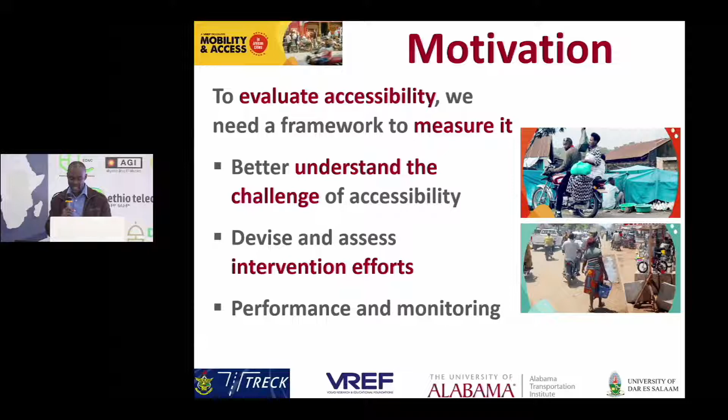So in what we refer to as informal urban communities, these are usually communities that have limited, for instance, land rights or limited social amenities, limited transport infrastructure. And in Sub-Saharan Africa, this constitutes about 72% of our urban landscape, and that is a huge part of most of our urban areas or cities in Sub-Saharan Africa.

And as we acknowledged earlier, they are limited. They also have limited facilities. Road construction may not be well maintained in those areas, or they may not have transport means. They might rely on non-motorized transport to be able to access some of these facilities as well. So they are limited in terms of addressing or mitigating some of these access issues.

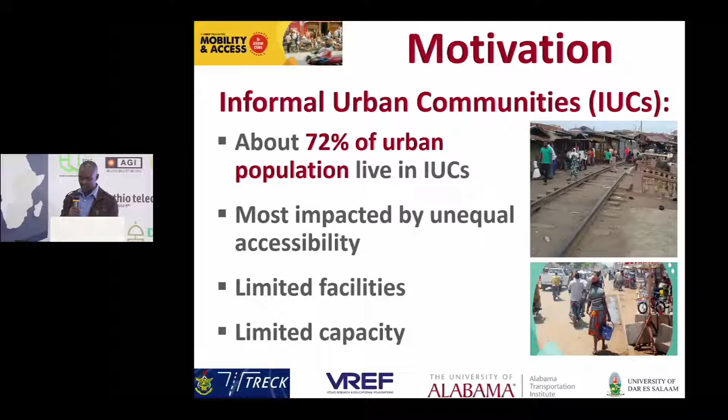So the challenge that we intend to address in this project was, how do informal urban communities perceive, experience, and use transport in their daily activities? And by this, we are not only looking at how we have provided road facilities and transport facilities, but we also want to know how users perceive and undertake those daily activities as well.

And we restate this, or reframe the research question, in terms of the extent to which that potential is achieved as an indicator of the performance of the transport system.

So to be able to do this measurement, we looked at two key measures. One is what we refer to as objective accessibility, and by this we mean once we are able to provide transport infrastructure and vehicles, either motorized or non-motorized, how does this facilitate people in reaching, for instance, a workplace, a healthcare place, school, or market? So that will be the objective accessibility, and this will be defined by the quality of the road network and the mode of transport used.

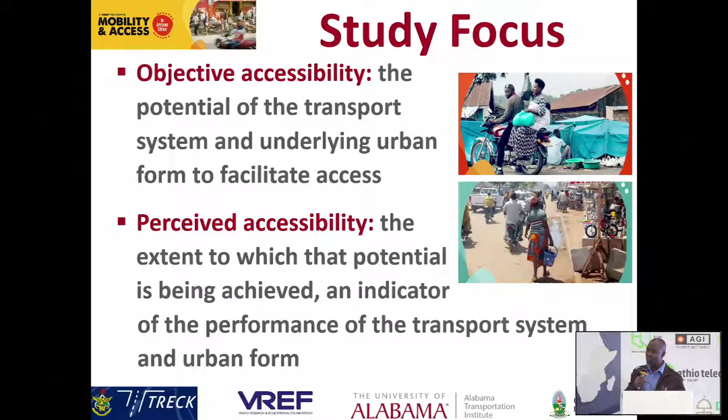But then we also look at the perceived accessibility, which is how users actually experience it. This is a way of assessing how our transport facility or infrastructure is performing, how it's helping people access a workplace, healthcare, a marketplace, a school, and all of those areas. So these are the two major aspects of accessibility we looked at, so that we can use it to assess transport infrastructure in general.

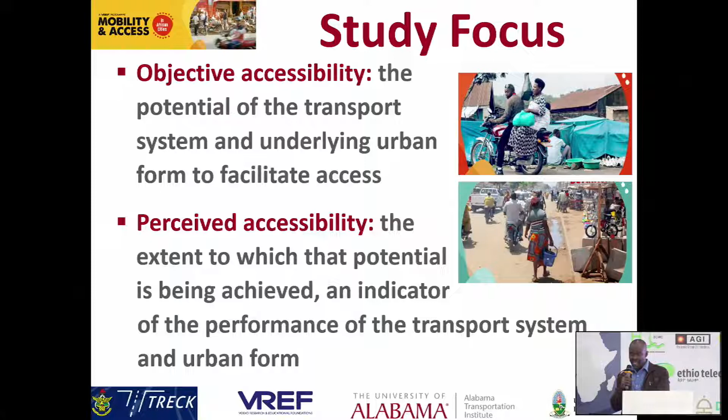To do this, we've looked at a number of socioeconomic and cultural opportunities, in terms of workplace, healthcare, shopping or markets, and the extent to which people can also access a school, place of worship, and family and friends.

The reason why we segregated quite a number of these basic needs is that sometimes people may participate in only one or two of them. For instance, if you are unemployed, you may not be able to travel to work. Or if you are not going to school, or you've finished school, you may not be able to answer that part of the question. So we've got a range of accessibility areas, so we can get a broad picture of how people actually experience accessing these opportunities.

So to do this, these are some of the study communities shown in this map. Here we are simply showing the map of Ghana, and Kumasi is around the middle of the country. Within Kumasi, we've selected a number of communities which we consider informal urban communities within the city. Kumasi is the second largest city in Ghana, a very sprawling city with a very high population density, and there are quite a number of informal communities with high density of buildings that impact how people access different opportunities.

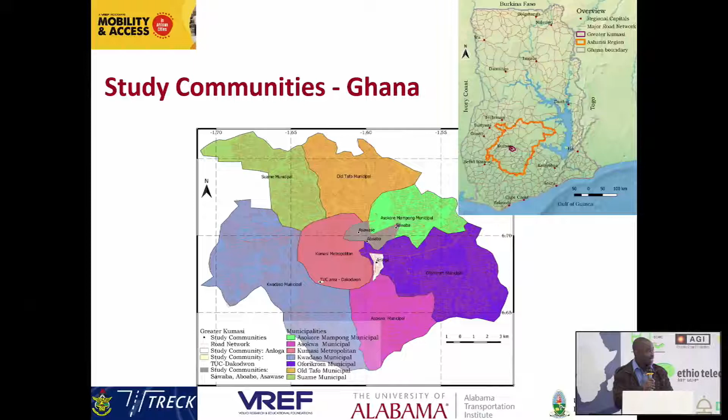The second city is Dar es Salaam in Tanzania, where we've also selected a number of communities. Dar es Salaam is a much bigger city compared to Kumasi, and has a higher population density, but there are similar transport modes in terms of paratransits, motorbike taxis, and tricycles used in both cities. So that is also a basis for comparing these two cities.

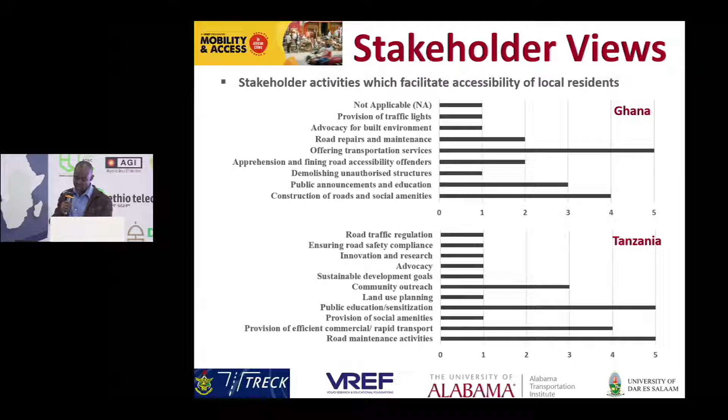Some of the things listed include offering transport services, construction of roads and social amenities, land use planning, settlement planning, and road maintenance activities. These are some of the leading stakeholder activities common to both cities.

There's also a question about what the stakeholders consider to be the causes of access problems, including lack of accessibility planning, traffic jams, traditional rulers or council collaborate poorly, lack of maintenance culture, poor implementation of policies, lack of logistics, poor transport coordination, and informal settlements as one of the common themes.

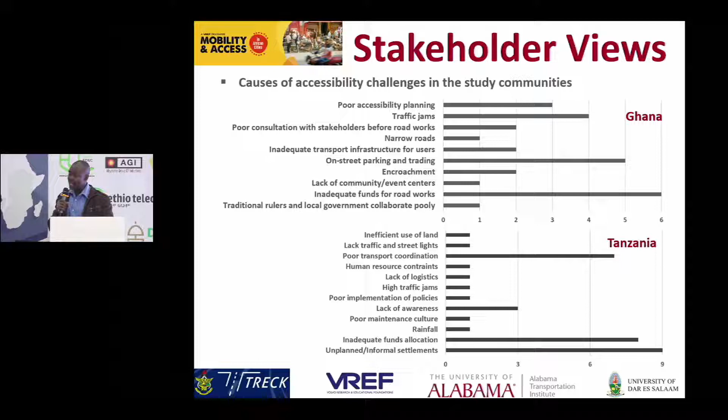We also looked at the solutions they recommended to mitigate accessibility issues in the community. These include public education or sensitization in both cities, BRT and bus stops, addressing illegal street parking, adequate provision for walkways and road signs, effective community planning, and proper periodic maintenance as a common solution between the two cities.

So the key takeaway from our stakeholder engagement for these two cities is, first, that most of the stakeholders are very knowledgeable about accessibility issues, which is very encouraging for coordinating activities between various stakeholders. This is common for both Tanzania and Ghana in our stakeholder consultation.

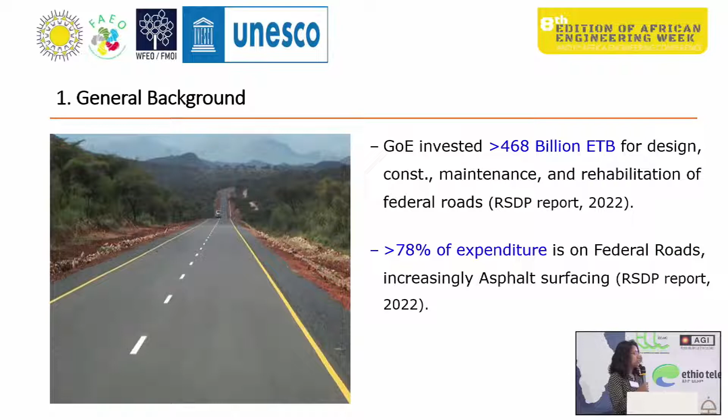As general background, we know that roads are very crucial for the economic development of any country. In this country, our government has been spending billions of dollars, especially for the last 24 years, towards the road sector. Most of this investment is allocated to federal roads. But the problem is that some of this investment, or part of it, is being threatened by premature failure of the roads.

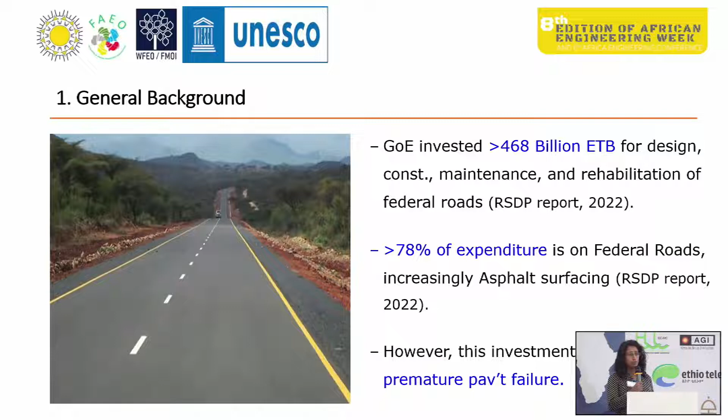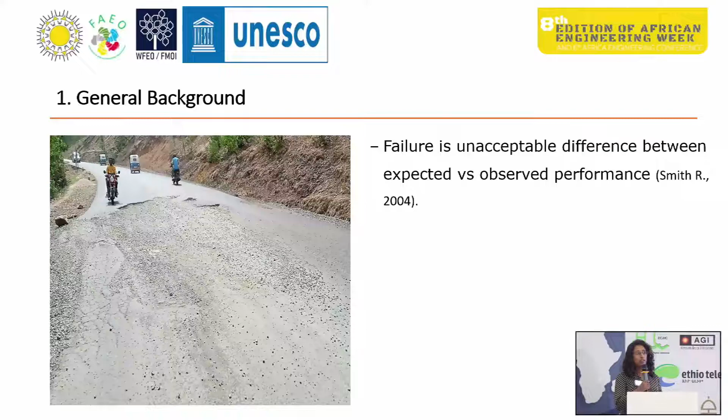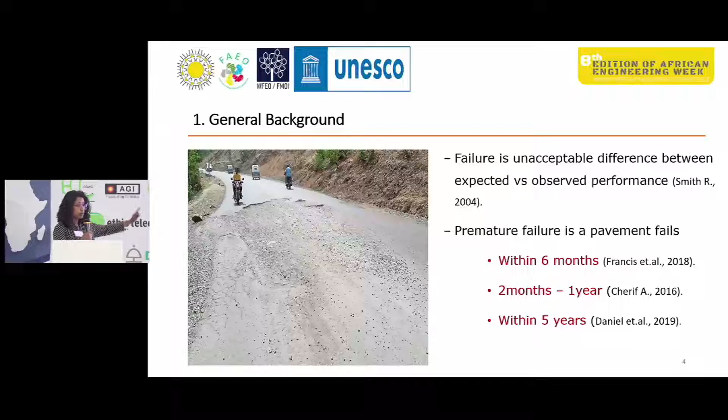So how do we define failure? There are various definitions, but one is that failure is an unacceptable difference between what is expected and what is actually realized. So how do we define a premature failure? According to different authors, it's a failure of a pavement way earlier than its design life. For example, if it fails within 6 months, according to Francis, it's said to be prematurely failed, or within 2 months to a year according to Cherif, or within 5 years after being opened to traffic. For our case, we considered a road that fails before serving a quarter of its design life as prematurely failed.

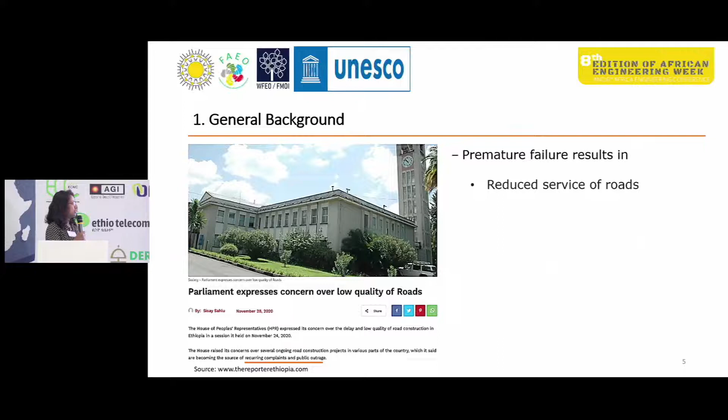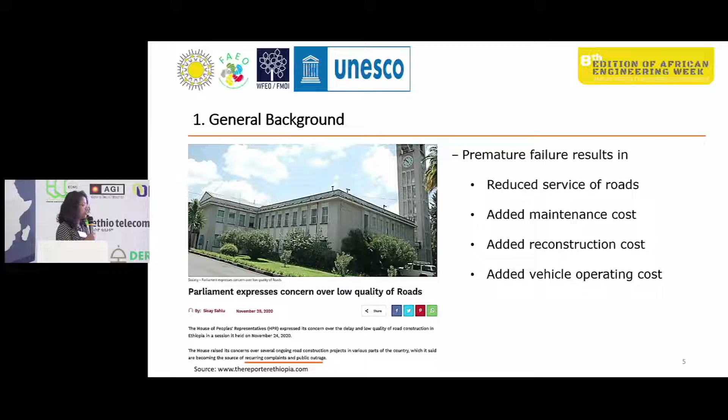So is this really a problem? And if it is, what is the extent of the problem? The problem with premature failure is that it reduces the service life of roads, adds to maintenance costs, causes added reconstruction, increases vehicle operating cost, and causes safety and comfort issues. As you can see here, this is an issue in some parts of the country.

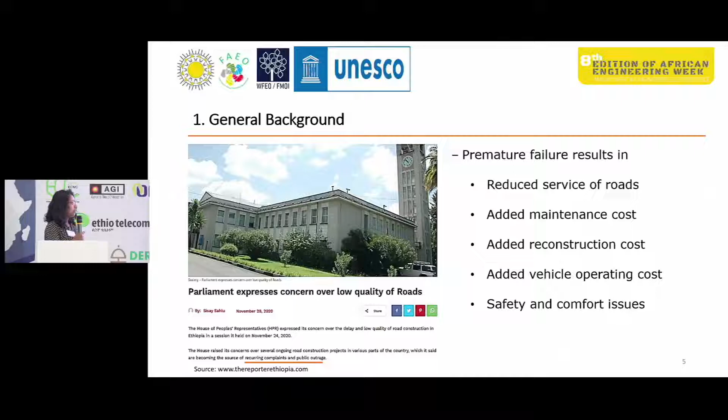There have been a number of case studies done to address this problem. The literature gap we identified is that, except for one paper, all of these studies didn't focus on premature failure specifically, but on failure in general. We would like to fill this gap with our study. The next gap we want to fill is that most of these studies are usually case studies based on laboratory study. What we'd like to do is also conduct field studies, investigate the asphalt characteristics as well, and try to make a generic conclusion about the trends of premature failure in this country.

So what is the objective of the study? In general, to identify the causes of premature asphalt concrete pavement failure and propose remedial measures so that similar problems will not occur in the future. The specific objectives include assessing the modes of failure on the roads, identifying the causes for those failures, and proposing remedial solutions for the identified problems.

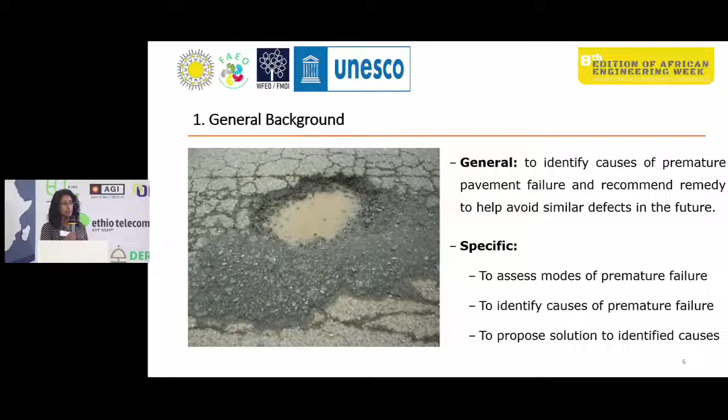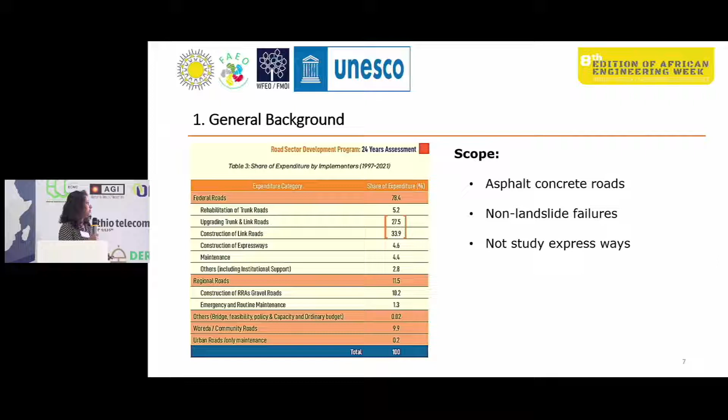So now let's see the methodology. Just like any research, we prepared the proposal, did the literature review, designed our research, and did preliminary assessment on selected potential sample roads.

Once we were convinced that a given road had failed prematurely based on our site assessment, we did a detailed investigation, starting from a desk study, meaning collecting previous design documents, reports, condition surveys, and so on about the road. Then we supported that with a field study and a laboratory study, analyzed the results, and produced a report as well as a draft journal article.

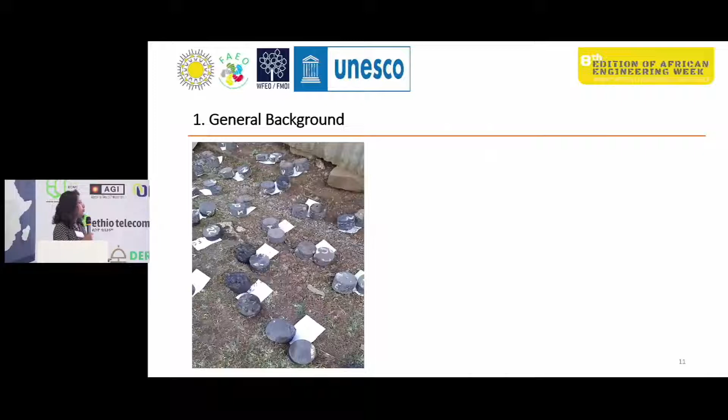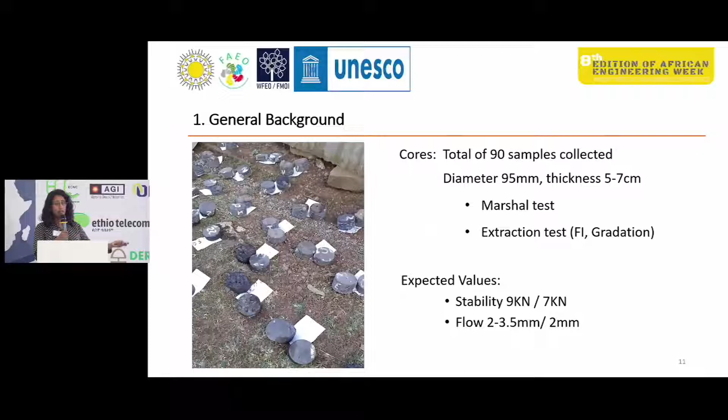This is the way we went about it, showing some of the laboratory tests we did. We contrasted our findings with the stipulations of the specification, the ERA manual specification. Also for the asphalt layer, we did a Marshall test and extraction test, and contrasted it with provisions of the specification as well as the assumptions of the design.

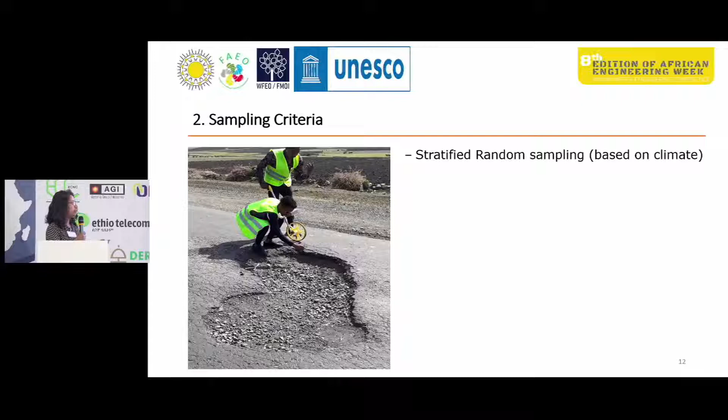Now let's see the sampling criteria. These are our researchers, Leknau and Tashome, as you will see in the abstract. Initially, we were preparing to do our sampling based on stratified random sampling, based on climate, and we were preparing to estimate the population size or sample size like this.

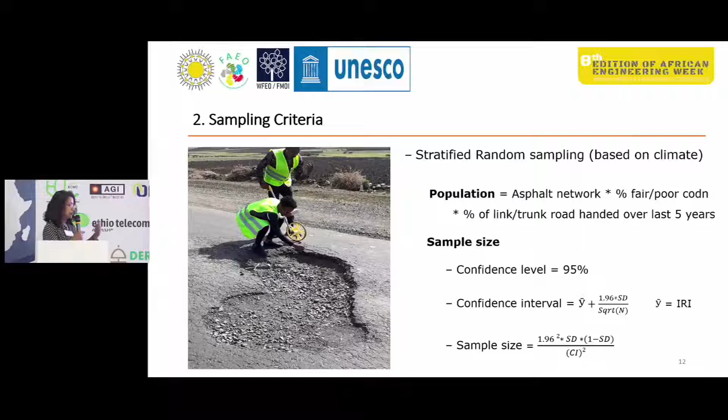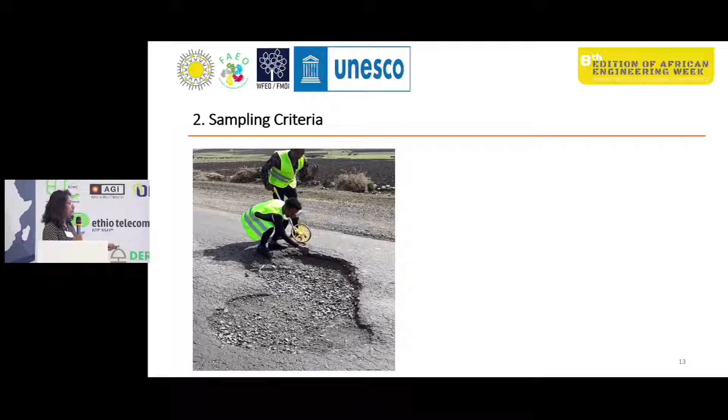However, we found that it just didn't work. We had to make specific judgment about the road, first visually, to determine if it should be sampled. For that reason, we changed our sampling strategy to purposive sampling, or non-probabilistic sampling. In that, we considered structural deformation or rutting. We selected tangent sections of the road for sampling, studied both the good and the defective sections, and considered a 300-meter stretch of the road as per our research procedures manual.

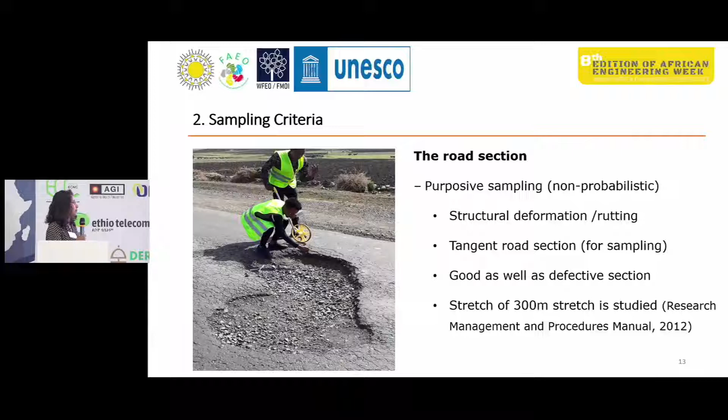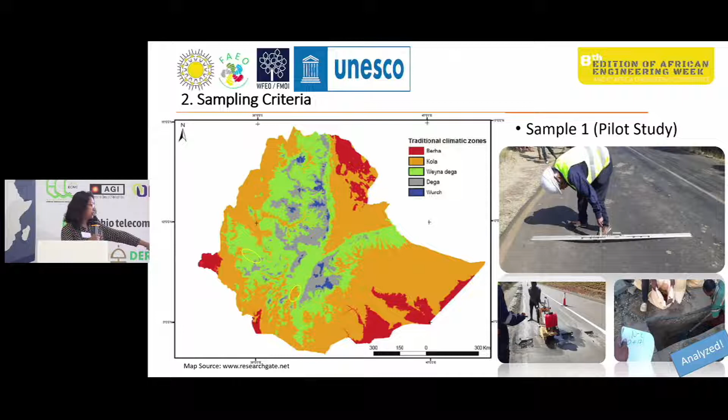This is the first pilot study we did, in the western part of our country. As you can see, we did visual assessment and analyzed everything. This is the second sample, taken in the southern part of our country. Here too, beyond visual assessment, as you can see, it has deteriorated very badly. We analyzed this in detail, and I will present a very brief overview of the findings for these roads.

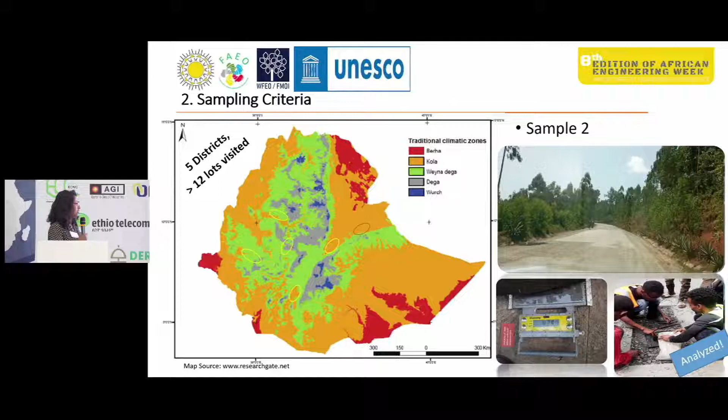For your information, we are also currently trying to assess our third road, in the eastern part of the country. To date, we have also assessed a number of lots in 5 districts, and more than 12 lots have been visited, but only 3 of those have met our premature failure criteria.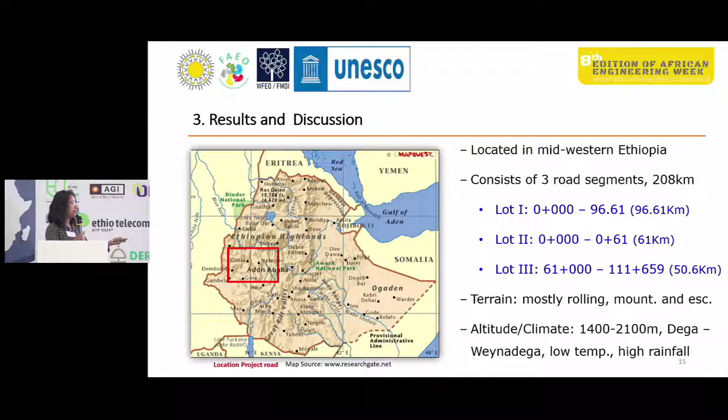This is a basic description of our first sample. It is located in Midwestern Ethiopia and consists of 3 road segments, meaning it was constructed by 3 contractors. The terrain is mostly rolling, though sometimes mountainous and escarpment sections are also observed. The area is a bit cold, with low temperature and high rainfall, sometimes with problematic soil underneath.

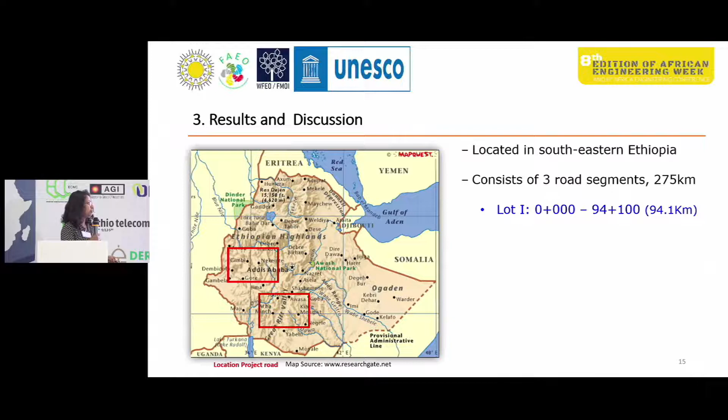For our second sample, located in the southeastern part of the country, it contains 3 road segments, but for our case we only selected one of them. The terrain is mostly rolling, sometimes flat to escarpment. The altitude ranges from 1,600 to 2,800 meters, and depending on the season, it can be very hot or very rainy.

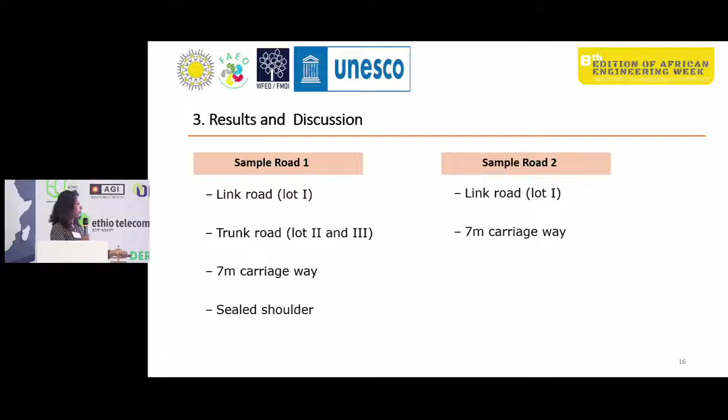As further description of the samples, functionally we have 1 link road and 2 trunk roads here, and 1 link road here. Both have a 7-meter carriageway. This one has a sealed shoulder, and this one has an unsealed shoulder.

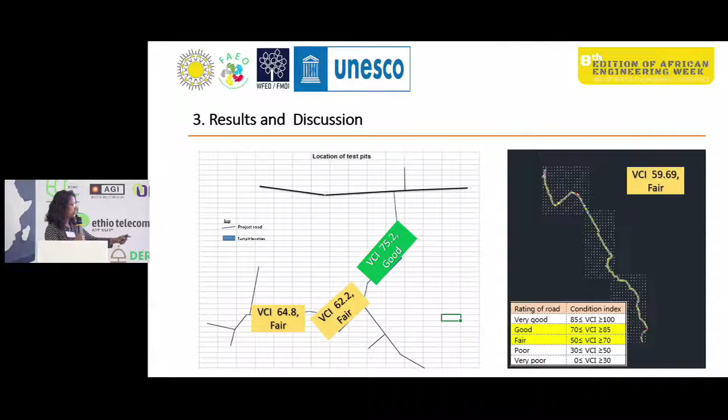Now, when we first did our condition survey, this is what we found. The first lot is in good condition, but that doesn't mean it doesn't have some extreme rutting. This one was in fair condition, this one was in fair condition, and this one was in fair condition. Fair is next to poor, so it's not the highest quality.

Traffic is one of the primary causes for pavement deterioration and pavement failure. The design traffic was DS4, and for the first sample it was designed for T6. But in actual fact, it was carrying a traffic load of T8 and T7, which means it was carrying double or triple of the design assumption.

For the second road, it was designed for T5, but however it was carrying a traffic load of T9. This also means the axle load has increased 5 times. The actual axle load is 5 times compared to the design assumption.

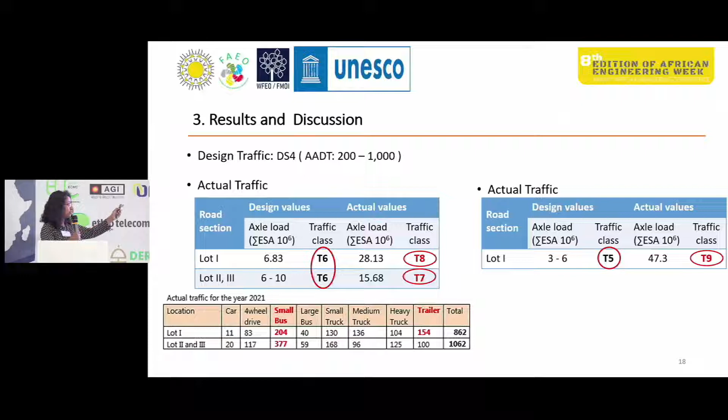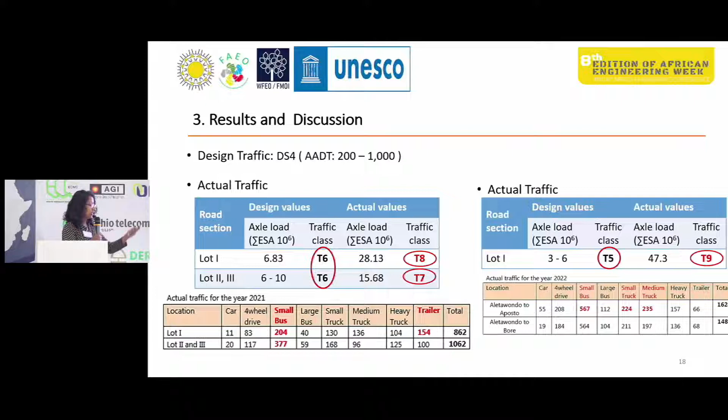When we try to see in depth what has changed with the traffic data, this is what we found. For the first sample, the number of small buses has significantly increased, and the trailers have also substantially increased, but the volume of traffic was reasonably forecasted - it's just the traffic load. But for this one, the volume of traffic exceeds the design assumption, and the axle load has also incredibly exceeded the design assumption.

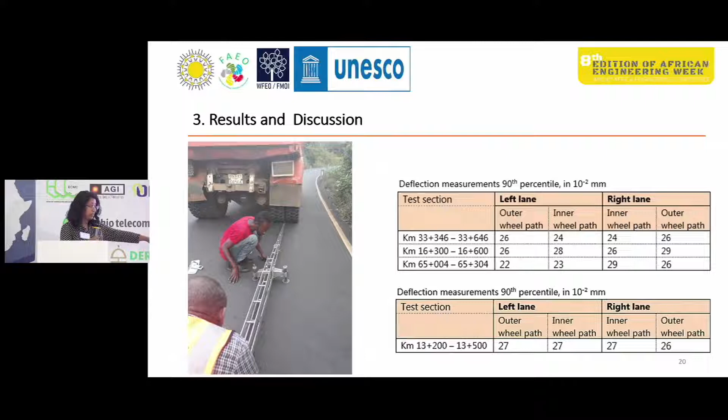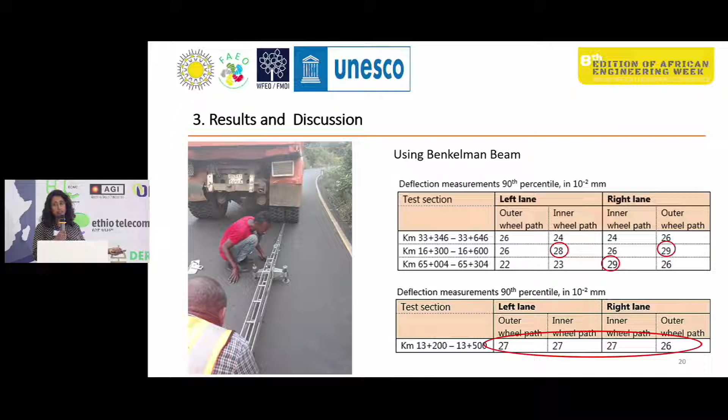For the second sample, there is extreme rutting in the inner wheel path, which is an indication of a structural problem. These are the values that we found for deflection. We used a Benkelman beam for lack of a better instrument. There is no restriction on the severity of deflection according to the ERA manual, but according to the Tanzania manual, this is not a severe deflection.

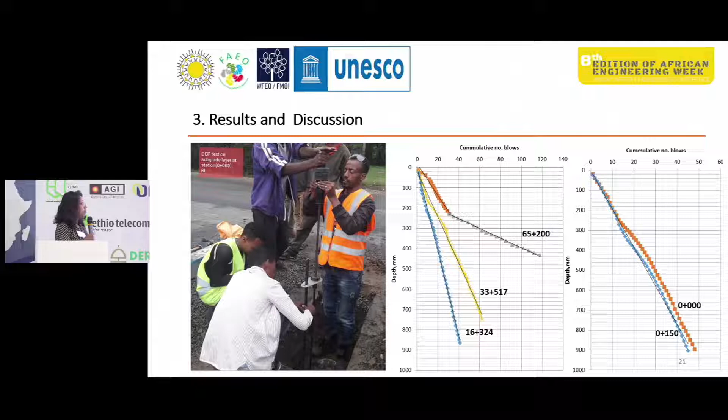This is also our DCP measurement on site, which is consistent with our CBR findings. We also tried to measure the thickness of the road compared to the designed assumption - this is the designed thickness. For the first sample, we found that all of the layers have the required thickness, except for the sub-base of the first lot and the asphalt road of the second lot.

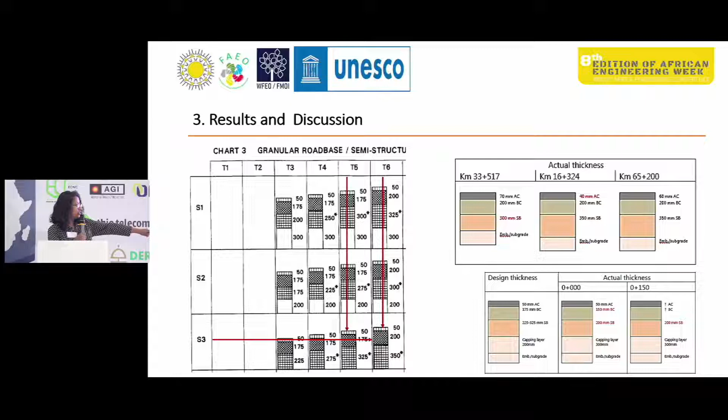This is the design thickness for the second sample. As you can see here, it has significant problems with thickness for both the base course and the sub-base. Now let's see the laboratory results and discussion.

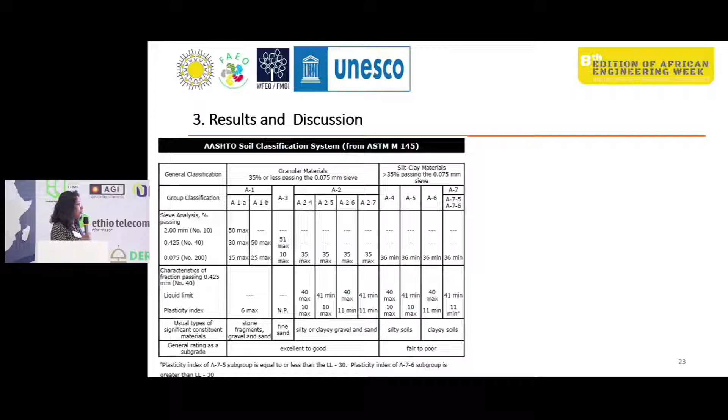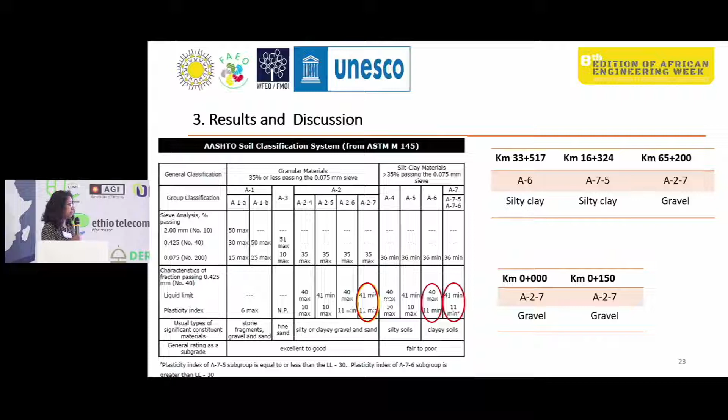For the second sample, the material was good subgrade material - actually it was a capping layer. So this is just an overview of the results. The red indicates the field criteria.

In the interest of time, we summarized the whole thing like this. For the first lot, which is a link road, the defect we found was for the sub-base: poor quality material, poor compaction and thickness issue. For the base course there is a gradation problem and compaction problem.

For the second lot, except for the compaction of the sub-base, we found a material quality problem and compaction problem throughout the layers. For the third lot, there is a compaction problem for the sub-base, and for the base course there is a poor quality material and poor compaction problem.

For the second sample, the subgrade material is good, it is a capping material, but the quality of material, the compaction and the thickness were problems for both the sub-base and the base course.

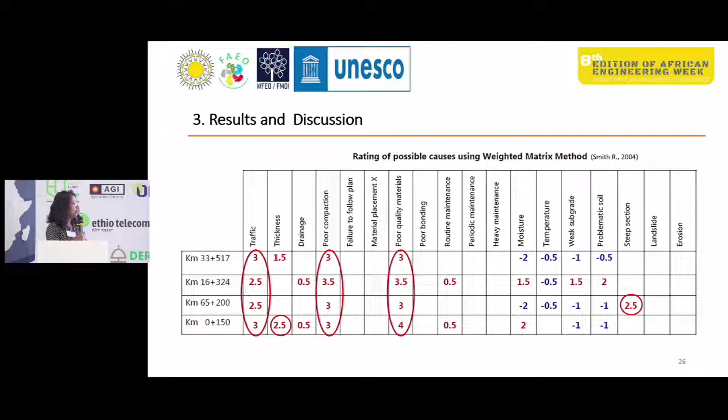This is next to my last slide, so we tried to quantify and prioritize the most probable cause of failure, and we find that poor quality material is the most probable cause of failure for the roads, and poor compaction is also a problem. We also identified increase in traffic load as a primary problem for the failure of the roads, and for some sections, terrain and improper thickness of the pavement have also contributed.

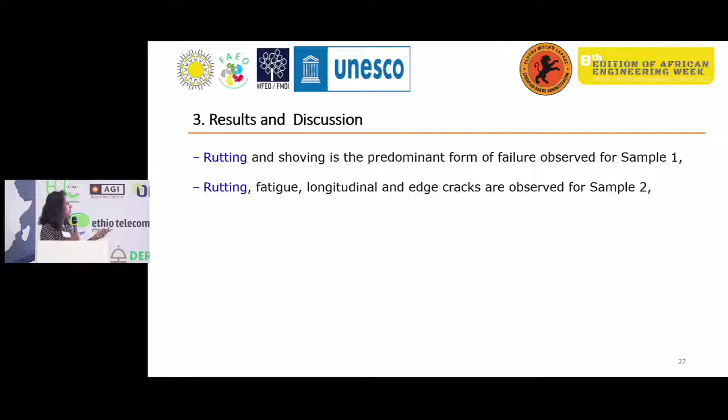As to the mode of failure, we find rutting and shoving as the predominant form of failure for sample 1, and rutting, fatigue, longitudinal and edge cracks were considered for sample 2. We have already discussed this one.

Our recommendation is that we should use good quality materials for our road construction. We should have strict supervision on site and quality assurance on site, and we should ensure that our site laboratories are reliable, and there needs to be proper compaction of layers.

According to South Africa's most established researcher, Philip Paige-Green, compaction is one of the least costly, cheapest ways to increase the quality of our roads. So we need to work on compaction. We also need to consider the percentage of heavy vehicle projection in our traffic forecast, and routine maintenance and axle load control should be given paramount attention.

These are the people we would like to thank for the success of this project: all the regional management directors, road asset personnel and the respective districts, and the organizers of this workshop. Thank you very much.

When she was talking about road quality, I was just wondering about the Trans-African route that stretches all the way from Cairo down to Cape Town. I had the pleasure of hosting the event where former President Uhuru Kenyatta and my Prime Minister Dr. Abiy launched part of that road, stretching from Moyale all the way to Hawassa. And between Hawassa and Ziway, how many kilometers would it be, Engineer Jonas? About 50 kilometers remaining to finish connecting Addis to Hawassa, to the port city of Mojo, then Hawassa, then Ziway, then all the way to Moyale, crossing through Kenya and down to the last station.

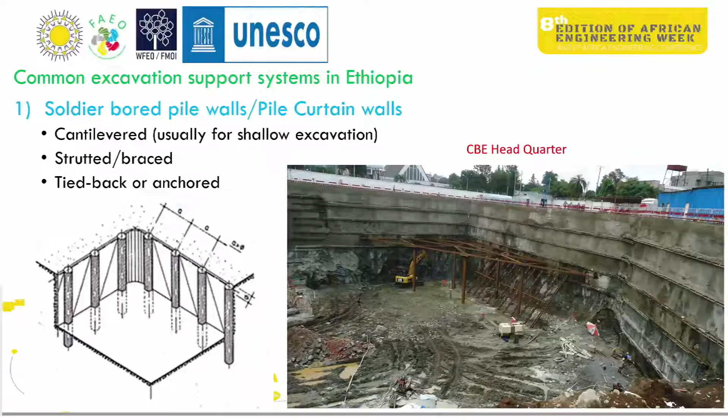In some parts I will touch on the practice done in the Omo River, but generally I will concentrate on the 4 basic practices done in Addis. The first and most common excavation support system in Addis Ababa is soldier bored pile walls. This kind of wall has been practiced for more than 10 years in Addis Ababa. We encounter more than 100 projects every year here, especially - the bottom right picture depicts the one used in the headquarters of the Commercial Bank of Ethiopia.

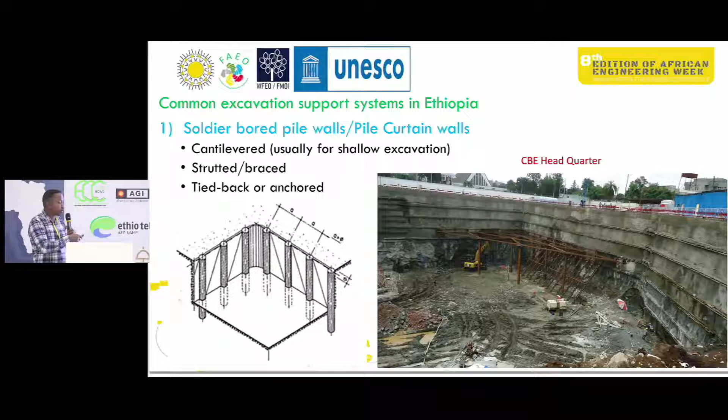It may be constructed using different combinations, but the most practiced ones are three: the cantilevered, the braced, and the tie-backed anchor ones. Basically, for shallow excavations we use the cantilevered type wall, but the rest are practiced when the depth of excavation increases and other circumstances occur. Especially the tie-backed or anchored type - it is somewhat time consuming and needs a lot of activities, so we usually use it for deep excavation of more than 8 or 9 meters.

The next common aspect of excavation support systems in Addis is the secant pile wall system.

In my experience, we have encountered this kind of construction twice. One is the Ethiopian Red Cross Society headquarter building, located near the Commercial Bank of Ethiopia, which is under construction - you can see it at the right bottom corner. In the middle is a shallow depth excavation done using a similar technique, including a corner brace, constructed for the Omo River bridge. These are schematic pictures to show that.

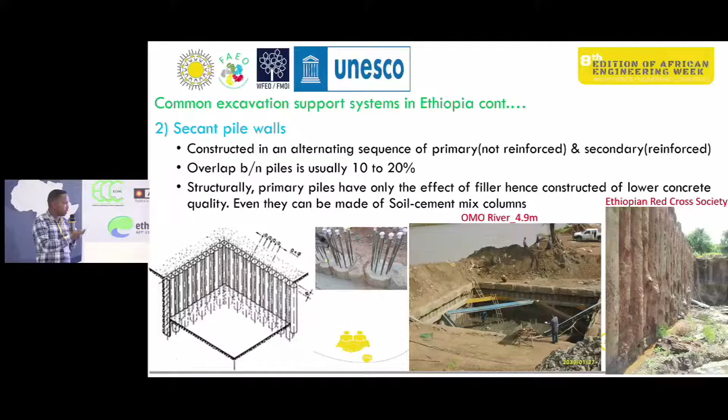Basically I like this type of construction because it's cost effective, but it's not as commonly used as the previous one. They can even be made from cement and soil mix columns, but the most common approach in our country is using primary and secondary piles, both concrete, but one reinforced and the other not reinforced.

The third common type - I don't know if you'll be familiar with this one - I always wonder whether this is permitted to be constructed in the city, but we encounter it a lot. I've encountered this kind of construction 7 times. You can see it at the right bottom corner. It's similar to the first type of construction, but to reduce the cost of reinforcement, they replace the reinforcement with treated woods, which are also used for shallow excavations.

Usually the piles range up to 9 meters, so the excavation is limited within 6 meters. This type of construction is common, and you will also encounter its failures. The one you see on the right is constructed, but it has also failed. It has no analysis or design concept - it's simply based on tradition.

The fourth common type - this one, I think, is patented. The owner of this construction company claims that he has patented it. It's based purely on labor. As you can see, it's done by manually digging cantilever pile walls and replacing them with concrete, done in stages.

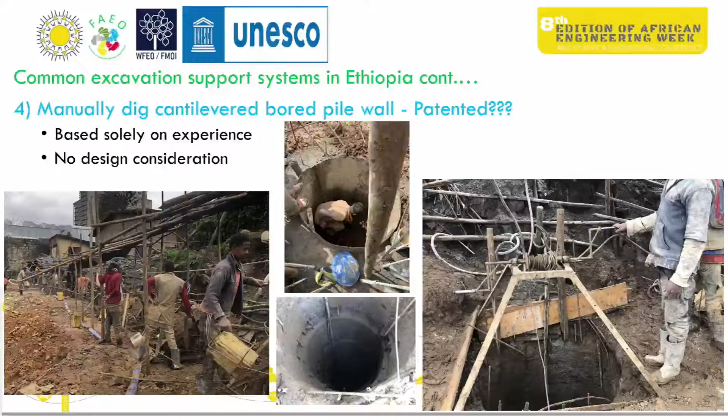It's very costly and very wide, but even in the downtown we encounter such projects. Even at the back side of this, there is a construction being undertaken using this method. This is a picture taken from that site.

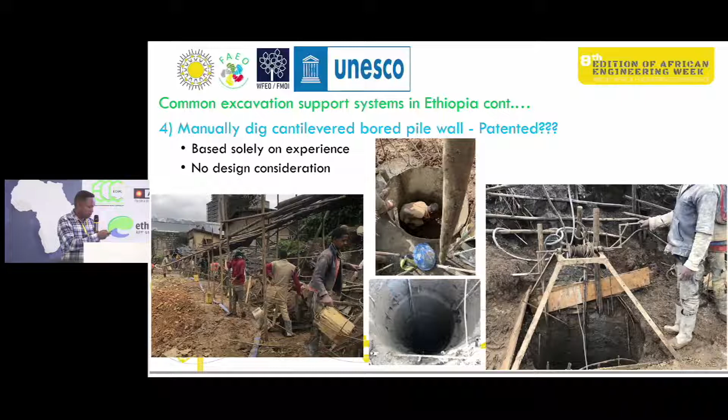So these four types of deep excavation support systems are the most common in Addis: the manually dug type, the one that replaces reinforcement with treated wood, the secant pile type, and the soldier pile and bored pile types.

Most of the time we encounter failures here and there, especially related to these deep excavations, particularly near existing structures. They commonly suffer from such problems.

So what are the common causes of such failures? We have tried to categorize them into 3 parts. The first common category we encountered is design-related issues. Under this there are many issues: poor geotechnical investigation reports, lack of expertise, the academic learning process also has its role, the manner in which professionals are accredited, and the lack of esteem for the profession, as evidenced by the salaries for these types of projects. The basic one we got from these categories is GIGO - garbage in, garbage out.

Most of the time, those involved in such design and analysis try to use either limit equilibrium, finite element, finite difference, or P-Y curve analysis. They simply feed the software whatever it asks without knowing, or with minimal background knowledge. Then it gives them an analysis output, which they use for construction, and then there is failure.

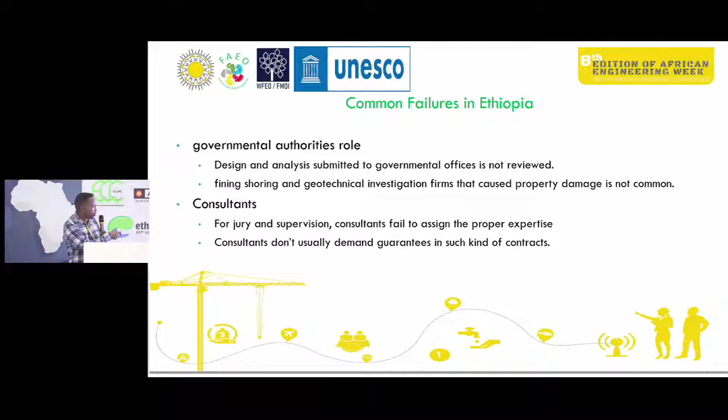The other issue is related to consultants. Most of the time, thinking it's a specialty, they don't treat it properly in terms of contract administration, assigning the right supervision, assigning jury, or even asking for guarantees. So if something fails, since the client has no guarantee for such construction, it becomes the client's burden, not the contractor's. Most of the time, consultants and such companies are weak in terms of this contractual aspect, especially for deep excavation support systems.

The other issue is poor construction, aside from design and analysis. During construction, this has a big role, especially the casing type, which most of the time isn't given enough concern. Most excavations or pile drilling can go to 20 meters deep. In the middle of that process, a lot of soil may collapse, and without using casings, many shorings have failed. I will show you a picture later.

The other issue is client interference. Clients have their own interests, especially after construction is completed—they need to extend the depth of excavation. They'll ask, what will happen if we go one more meter? They say, I will take the risk, please, I will take responsibility later. Then the whole area ends up in a crisis.

Next is the construction sequence. Clients usually want a whole meter of excavation completed within 1 to 3 days. They don't want to maintain the proper construction sequence. So clients specifically are involved in causing this kind of fault.

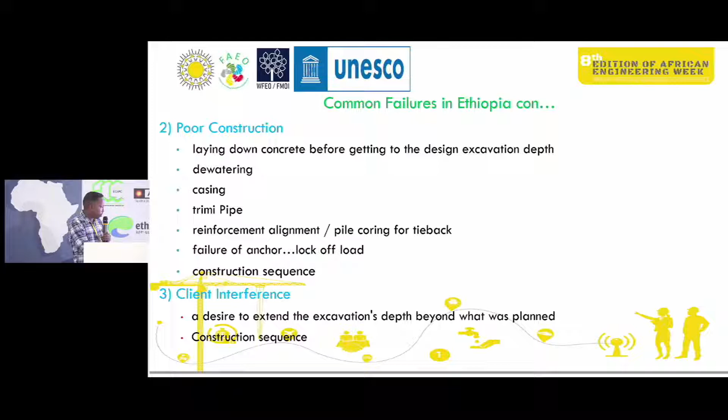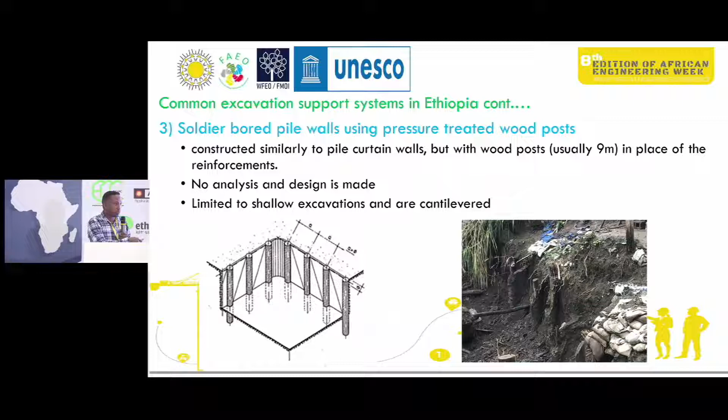The problem with this one was that they were advised to use proper construction, but the clients preferred to save $1 million, so they went with a type of construction that replaced reinforcement with treated wood. There was a lot of dialogue, but the clients preferred this option because it was $1 million cheaper. What happened was this catastrophic failure on the right side—a total of 4.5 million was lost. In order to save 1 million, the client lost more than 4.5 million.

For this project, my colleague Dr. Engineer Henok and I were involved in the mitigation action. What surprised me about this project was that the client was not happy with the local contractors or even practicing engineers. During the discussion, while we were presenting the remedial action to him, he was trying to negotiate with the neighboring people in order to own their land.

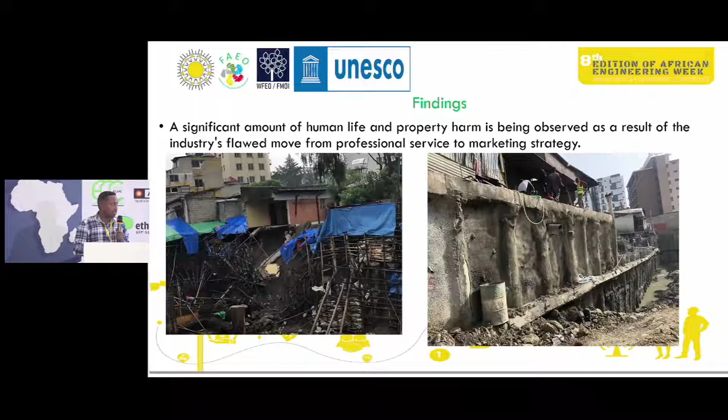Thank you very much. One more thing I want to stress as a conclusion, sorry for that.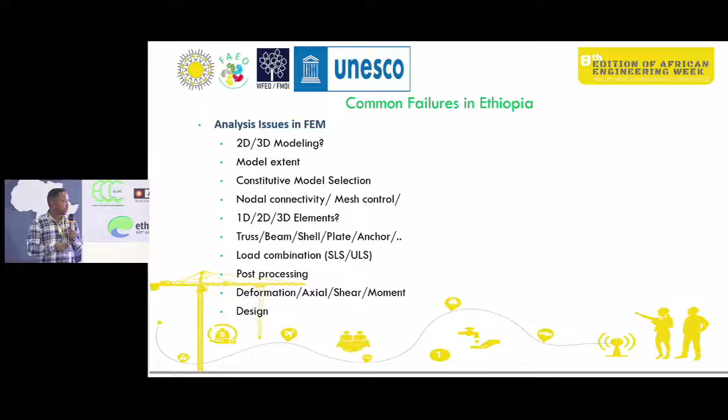I've tried to list the problems: the design problems, the construction problems, the analysis problems, the governmental roles, the teaching and learning process, everything. So the remedial action we recommend for such kind of projects is that we always tell engineers that such structures involve high USD costs, especially for our country, it's too tough, so they are temporary structures. Let us try to be concerned in order to save some money. We should not spend, we should not give inappropriate sections, especially the associations. The Ethiopian Civil Association is helping us. We also have the Ethiopian Geotechnical Association, which is already constructed. We are trying to do such kinds of things as seminars and conferences. So deep excavation should not be taken lightly. Thank you very much.